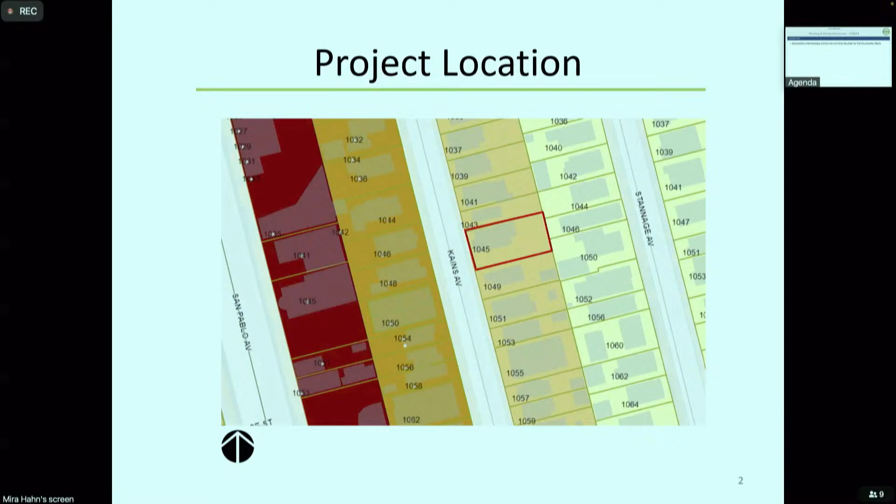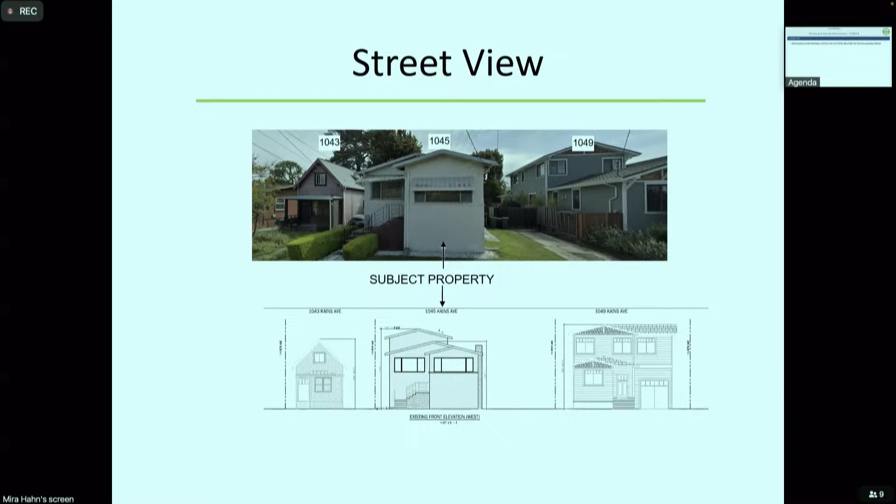This is the subject property from street view, and its adjacent neighboring properties. So basically, the project request is first to lift the front portion of the existing split-level residence, to convert the existing crawl space into habitable area, and to align that existing main lower level with the upper level. We'll see in the elevation drawings, it'll make more sense. So the maximum existing height is 22 feet 4 inches, and the maximum resulting height would be 23 feet 4 inches.

Second, another proposal in the scope of work is to construct a two-story addition at the rear and right southeast side of the home, and a new two-car garage attached to the south side of the house, and to demolish the existing covered front porch and stairs and construct a new, smaller covered porch at street level.

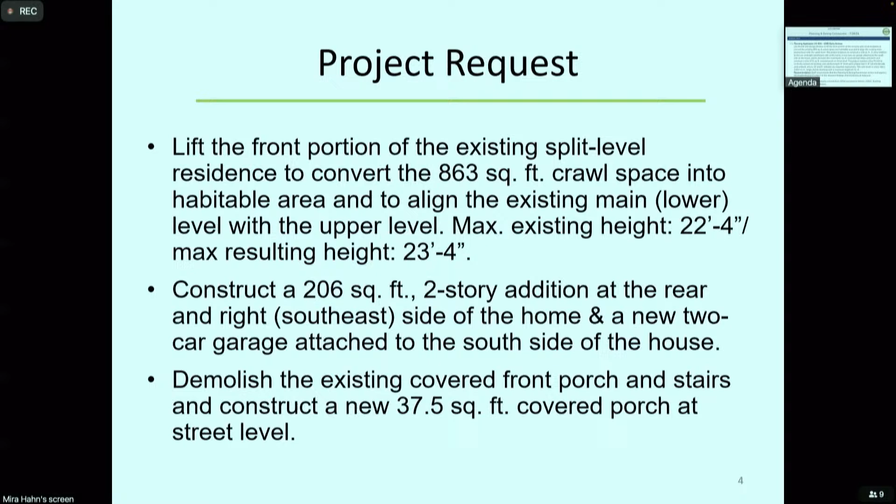So we'll see here. And so I should say that these are the entitlements required. It requires a use permit to vertically extend the existing non-conforming 6 foot 9 inch front yard setback and 3 foot 9 inch left north side yard setback, as 15 feet and 5 feet are required respectively per our municipal code. It also requires design review for the overall proposed construction, as lifting the home is the equivalent of creating a second-story addition.

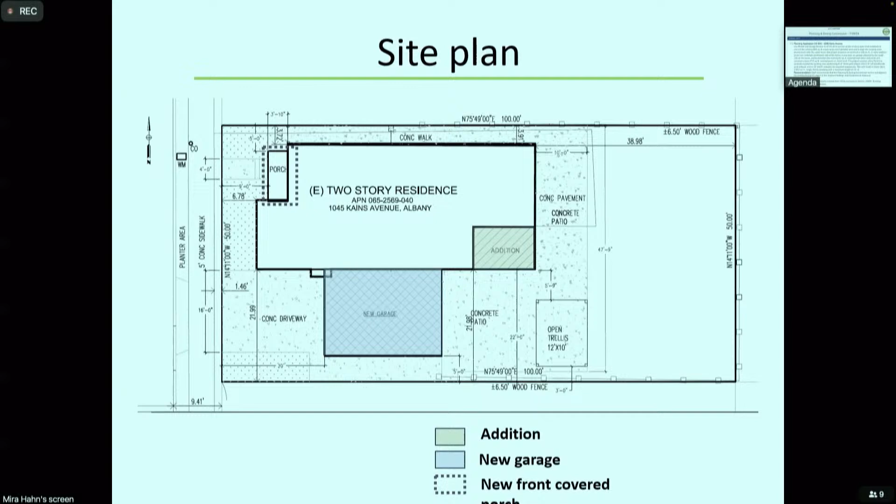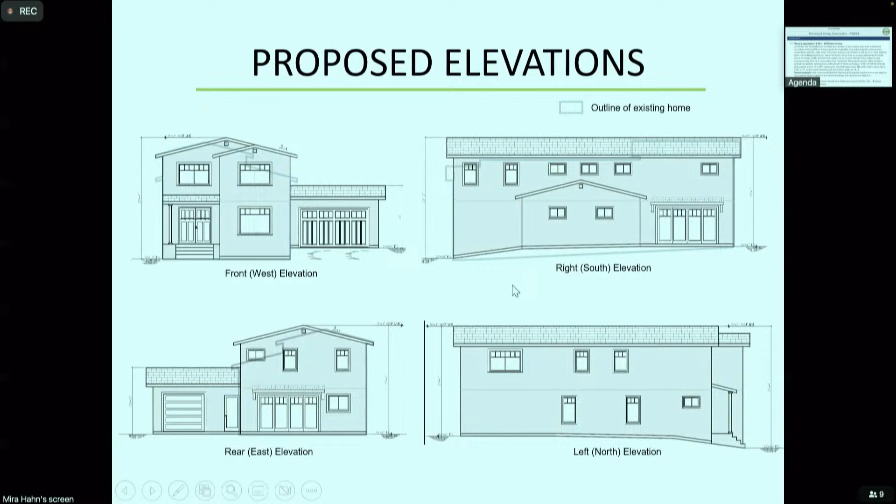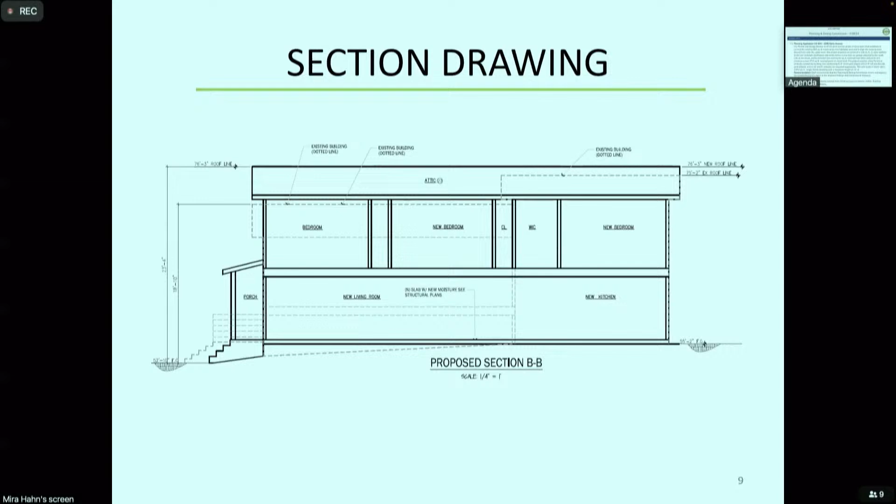And in this section drawing, the dotted line represents the existing house, to illustrate what the change would be.

This project exceeds 45% floor to area ratio, and these are subject to exceptional design review by the Planning and Zoning Commission.

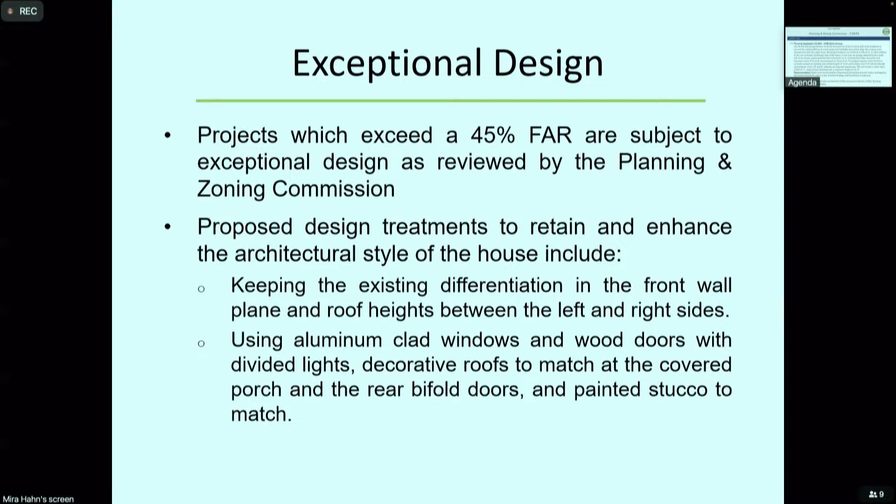The proposed design treatments to retain and enhance the architectural style of the house include keeping the existing differentiation in the front wall plane and the roof heights between the left and right sides. It also uses aluminum-clad windows and wood doors with divided lights, decorative roofs to match at the covered porch, and rear bifold doors and painted stucco to match.

All right, thank you very much. Are there any commission questions for staff?

Are they really going to lift part of the house, rather than demolish that part and rebuild? My understanding is that they are going to raise the ceiling of the existing crawl space, leveling the existing floor on the basement or crawl space, to create habitable space there. By doing that, they're also raising the main story a little bit more to level it and align it with the existing second story addition. They're raising it, but I'm wondering if the actual framing is going to be raised, or will they demolish and rebuild? I would think they'd demolish and rebuild, but if they're reusing existing framing, that's great.

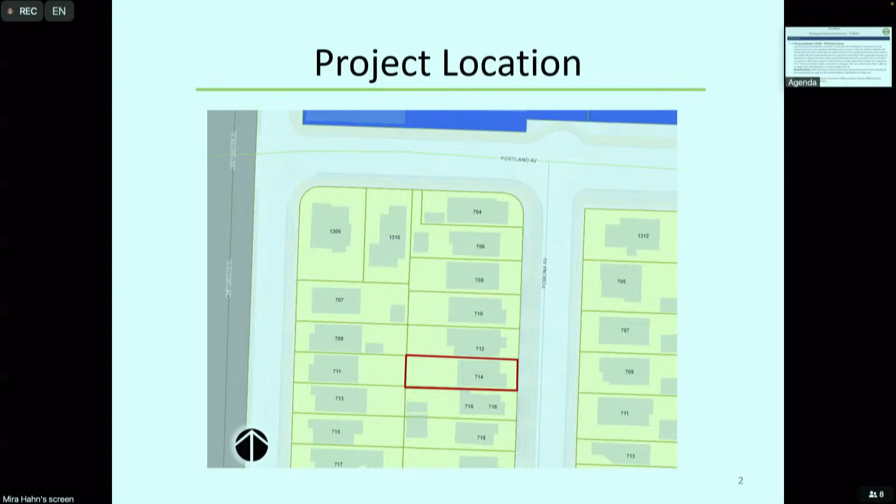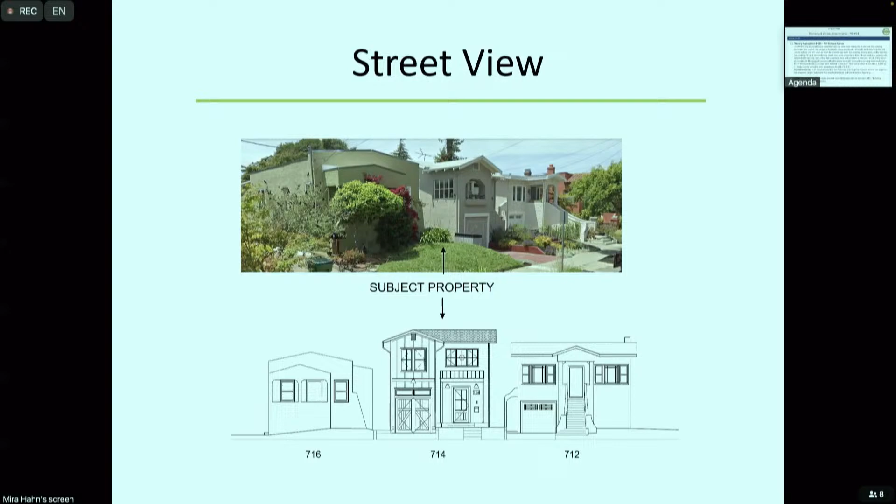We do, Vice Chair. Yes, it's very similar in many ways to the previous application in that both require a use permit and design review as well. So we'll go into that. That's the project location on Pomona, on the west side of Pomona Avenue. That's the subject property from street view, and the drawing we see there, the elevation, is the proposed, not the existing.

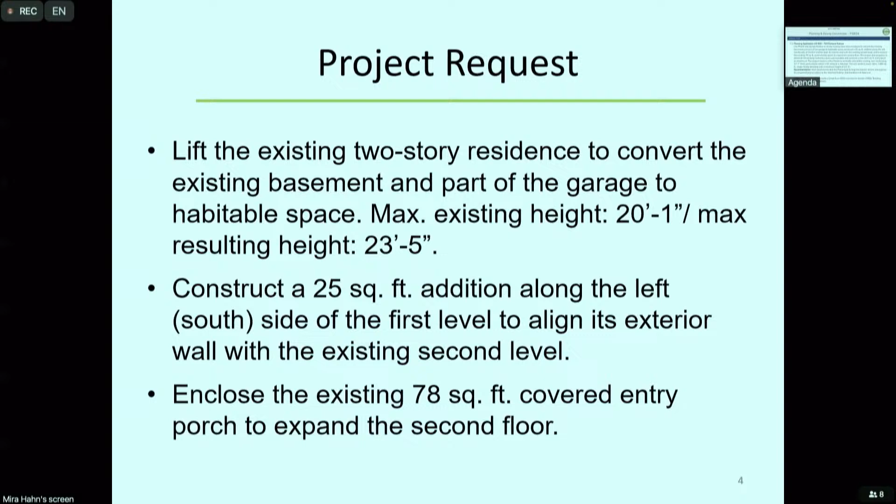The project requests to lift the existing two-story residence to convert the existing basement and part of the garage to habitable space. It's going from a maximum existing height of 20 feet 1 inch to a resulting height of 23 feet 5 inches. It also includes constructing a small 25 square foot addition along the left south side of the first level to align its exterior wall with the existing second level wall, just popping it out a little bit, and to enclose the existing 78 square foot covered entry porch to expand the second floor. It requires a use permit to extend the existing non-conforming 12-foot 7-inch front yard setback where 15 feet are required, and design review for the overall proposed construction, as lifting the home is the equivalent of a second-story addition.

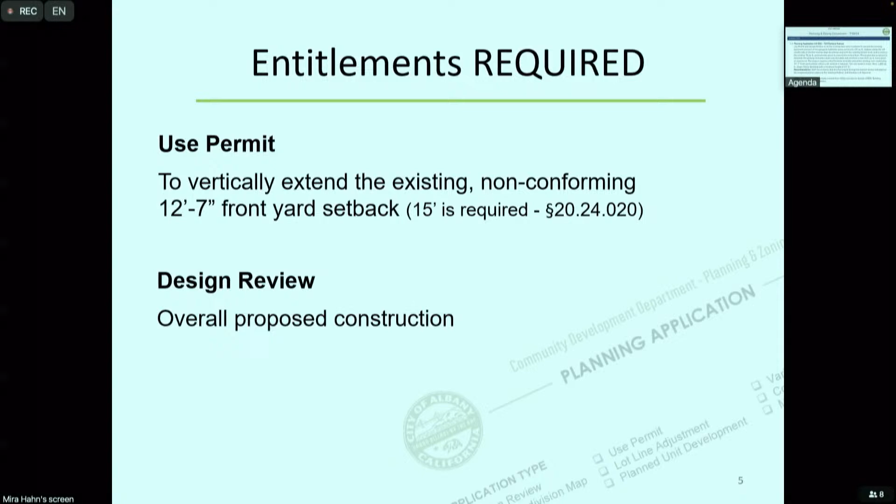That's the project from site plan view. You can see the super thin line at the top; light green is the first level addition to align the wall to the second story upper story wall, and the light blue is the enclosed porch for the second level addition.

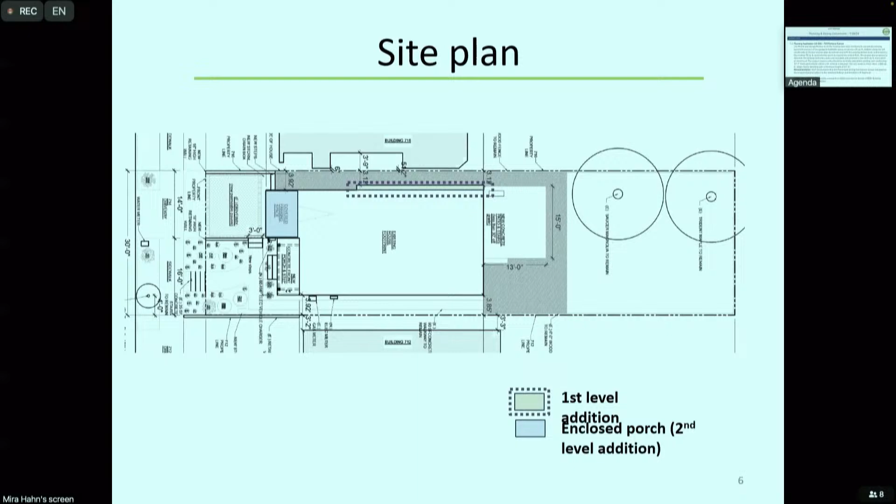These are the existing and proposed elevations. As with the previous presentation, I added a very faint outline of the existing home, just to show what it is. Maybe it was too faint, but I didn't want to compromise the drawing. Basically, in this case, they're literally lifting the whole home to make room at the basement. They're not making any significant additions.

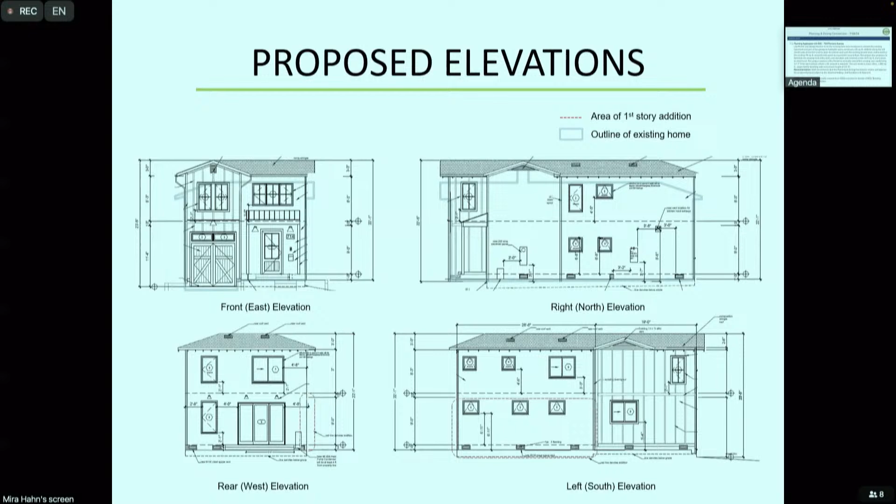This is also exceptional design review. I should mention, since I forgot earlier while you were discussing landscaping for the previous project, that projects which exceed 45% FAR must include a landscape plan. If it isn't included in the design review plan, it has to come in with the building permit.

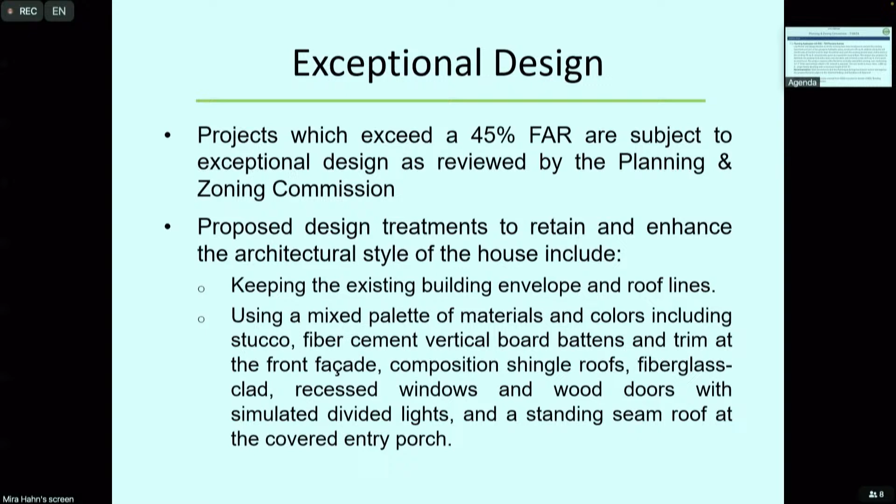It's a requirement, so it was included in this set. The proposed design treatments to retain and enhance the architectural style of the house include keeping the existing building envelope and roof lines, using a mixed palette of materials and colors including stucco, fiber cement, vertical board and batten, and trim at the front facade, composition shingled roofs, fiberglass clad recessed windows, wood doors with simulated divided lights, and a standing seam roof at the covered entry porch.

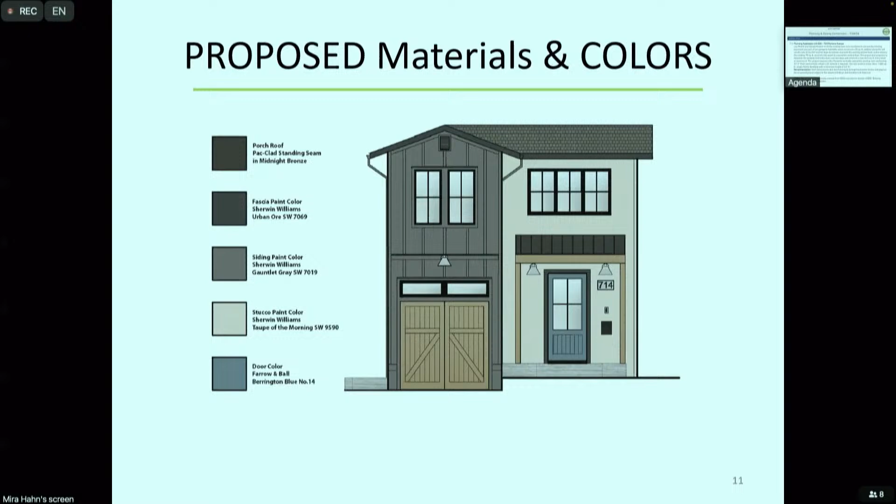These are the proposed materials and colors, as you can see on the color elevation drawing. We did not receive any correspondence for this project either. Staff recommends that the Planning and Zoning Commission review and approve the proposed project subject to the findings and conditions of approval. Okay, thank you.

Does any commissioner have any questions for the planning staff? No questions.

Is the applicant or architect available by any chance? Looks like probably not. The architect happens to be the property owner as well, but I don't see her. Not seeing anyone online. All right, thank you for letting me know.

No questions? Any member of the public have any questions? If anyone online would like to address the commission on this project at 714 Pomona, please use the raise your hand function. I'm not seeing any hands raised.

Okay, with that, any commissioners' comments for the project? Sure, happy to jump in and opine. It's kind of nice that these are on the same agenda — this item and the one before. I think they're really similar projects, similar asks, and somewhat similar executions. So I'm reiterating many of the same things I said for the other project.